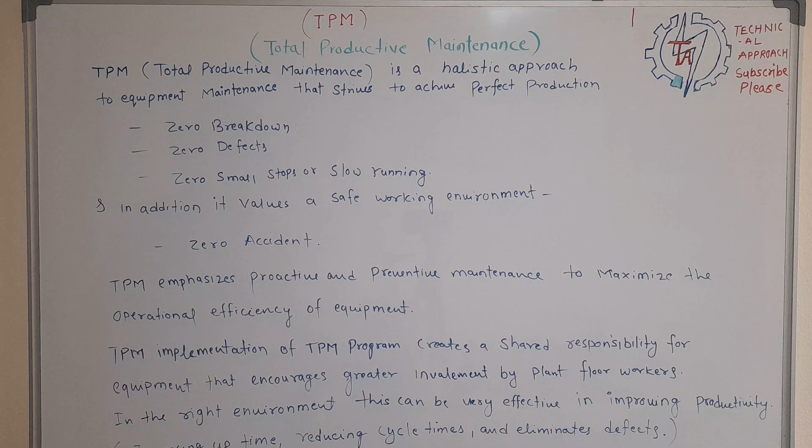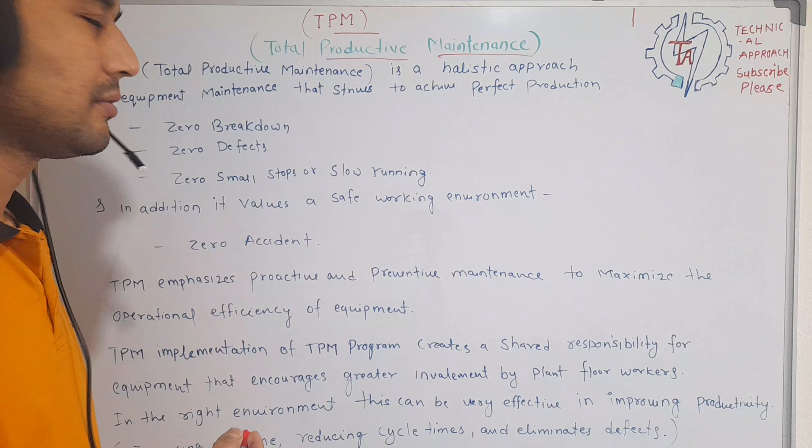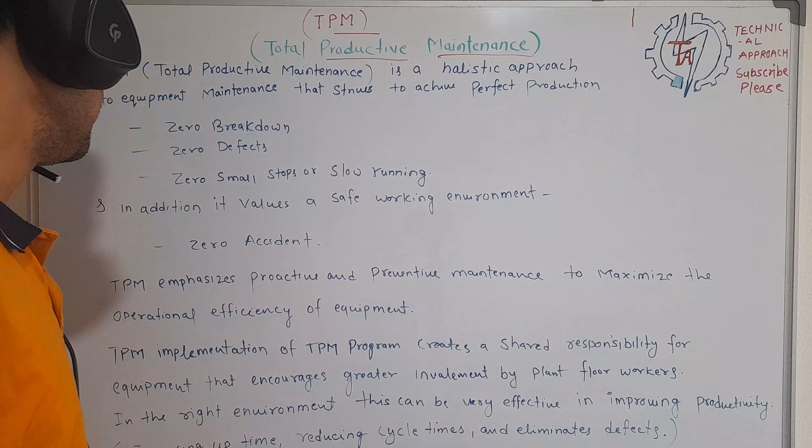Today my topic is TPM. The full form of TPM is total productive maintenance. Most people want to know what is TPM. So TPM, total productive maintenance, is a holistic approach to equipment maintenance that strives to achieve perfect production.

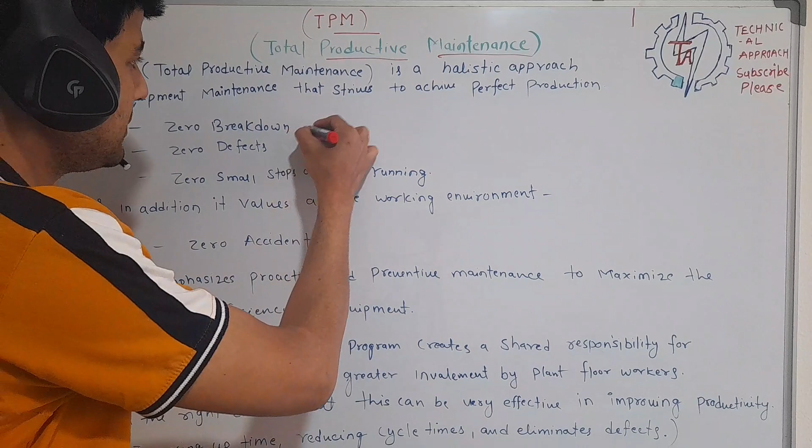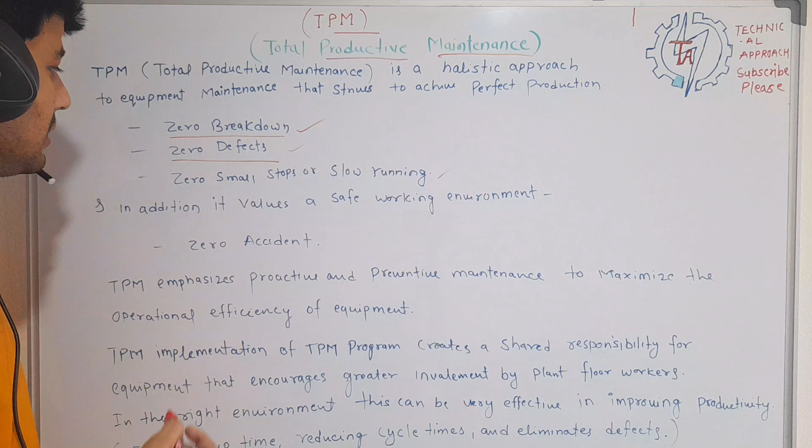TPM follows these points: zero breakdown, zero defect, zero small stops or slow running. In addition, it values a safe working environment or culture, so the fourth is zero accident.

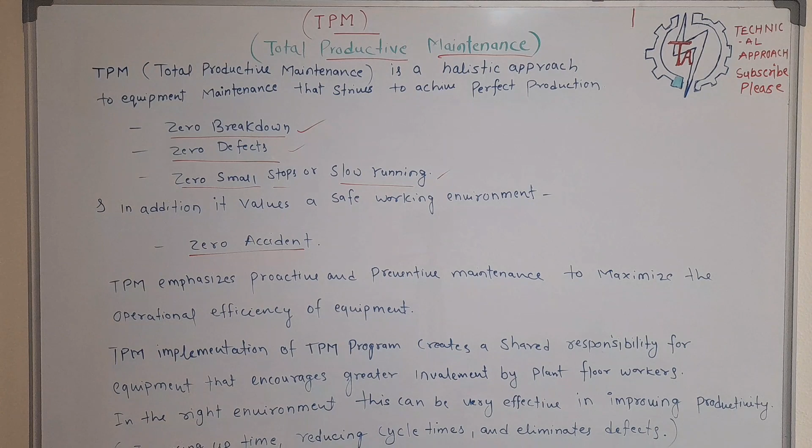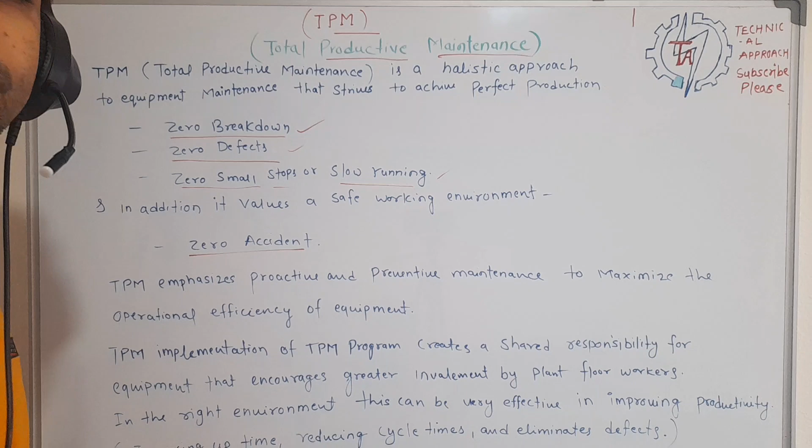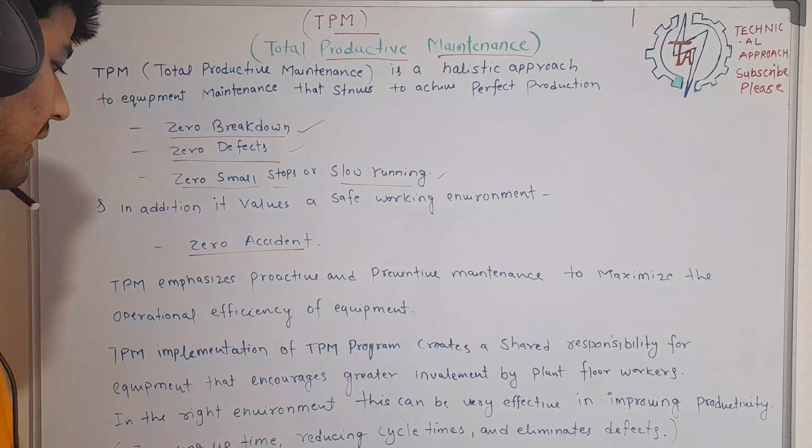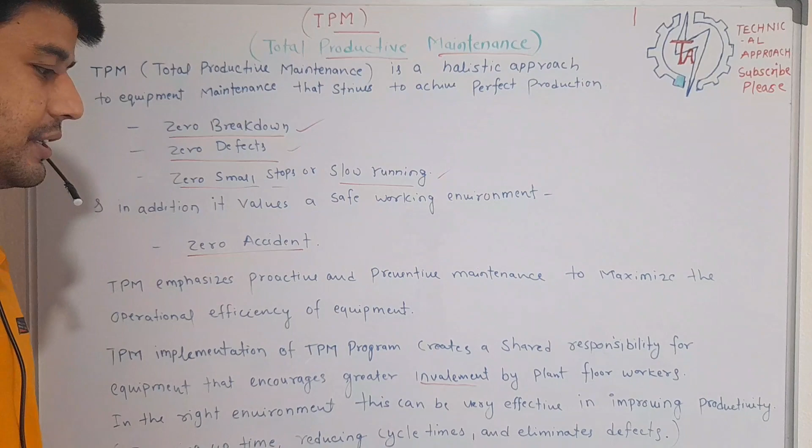TPM emphasizes proactive and preventive maintenance to maximize the operational efficiency of equipment. Implementation of a TPM program creates shared responsibility for equipment that encourages greater involvement by plant floor workers. In the right environment, this can be very effective in improving productivity, increasing uptime, reducing cycle time, and eliminating defects.

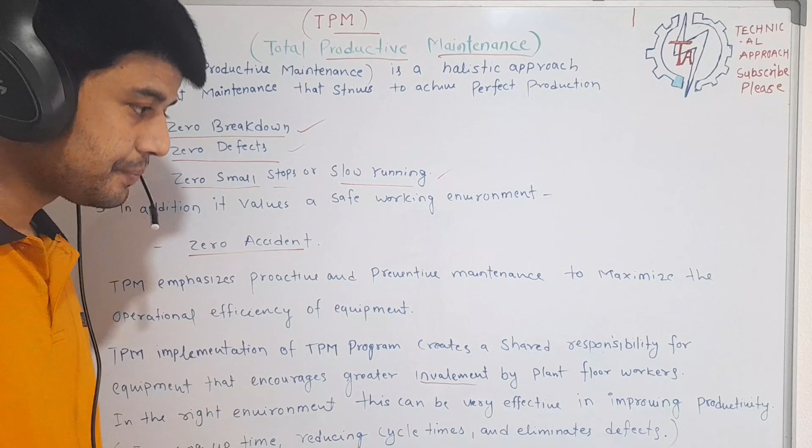Let us discuss total productive maintenance traditional TPM pillars. The traditional approach to TPM was developed in the 1960s and consists of 5 S as a foundation and 8 supporting activities. The 5 S I will define in my next video. Let us discuss here the 8 supporting activities, the pillars.

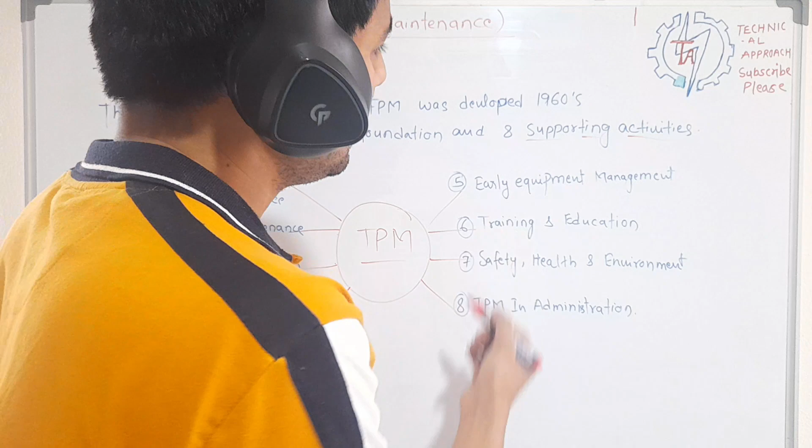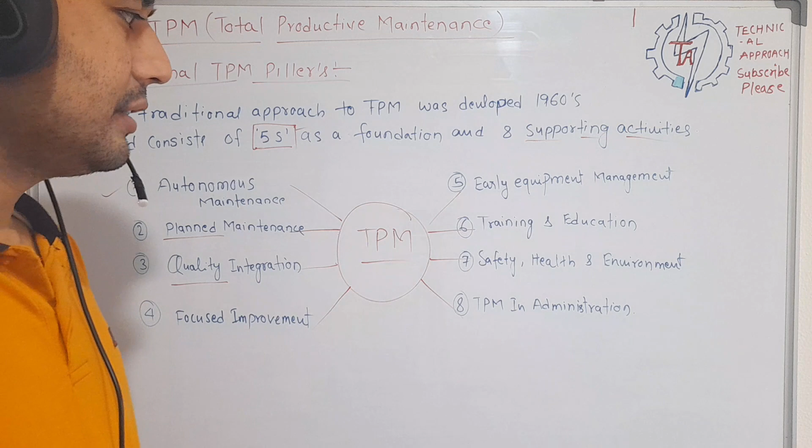The TPM 8 pillars are: first, autonomous maintenance; second, planned maintenance; third, quality integration; fourth, focused improvement; fifth, early equipment management; sixth, training and education; seventh, safety, health and environment; eighth, TPM in administration. Let's discuss all 8 pillars one by one.

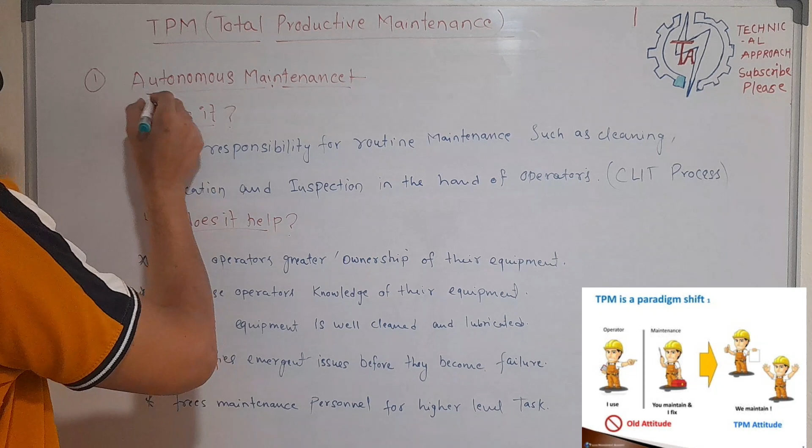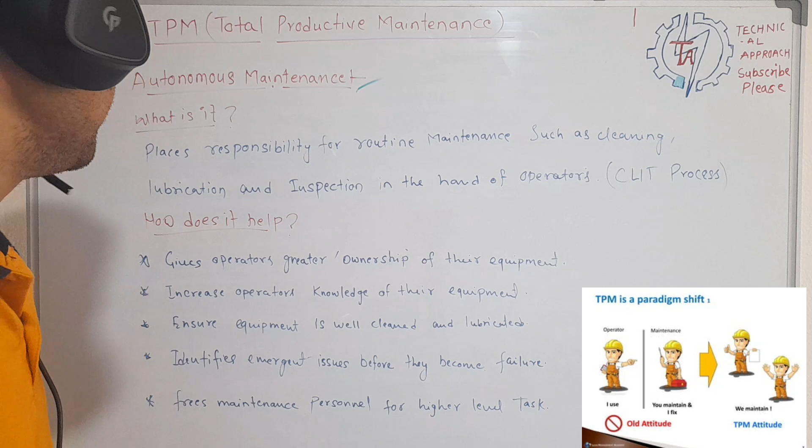The first one is autonomous maintenance. What is it and how does it help in TPM? It places responsibility for routine maintenance such as cleaning, lubrication and inspection in the hands of operators. Here we follow the CLIT process.

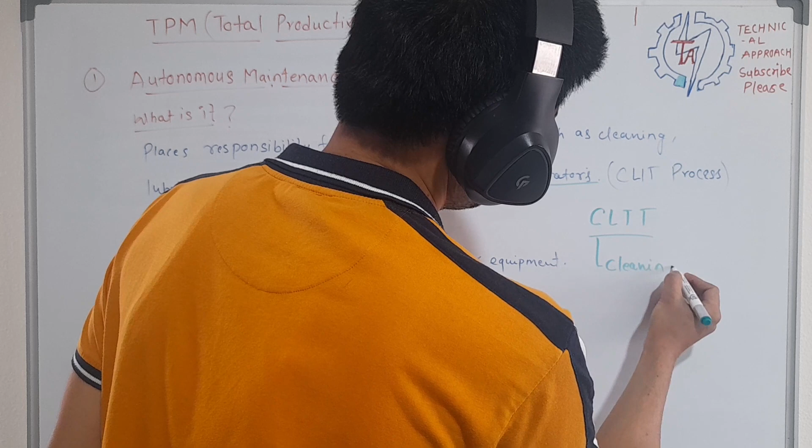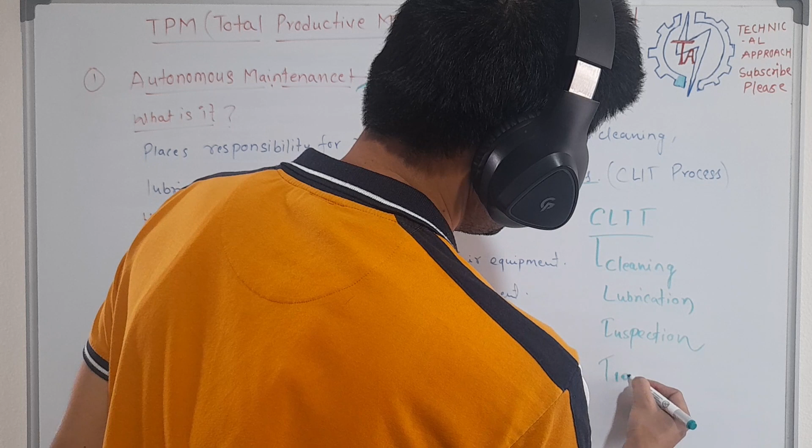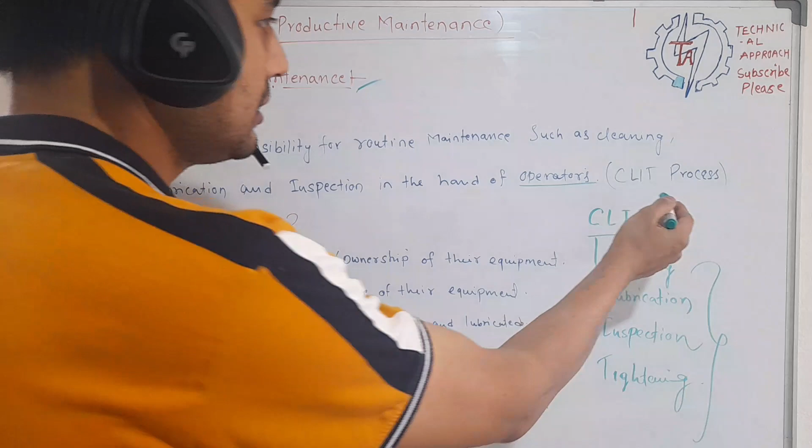Cleaning, lubrication, inspection, and the last one is tightening. If any operator is there, it should be the responsibility of operators for daily routine checkup of the equipment. So how does it help?

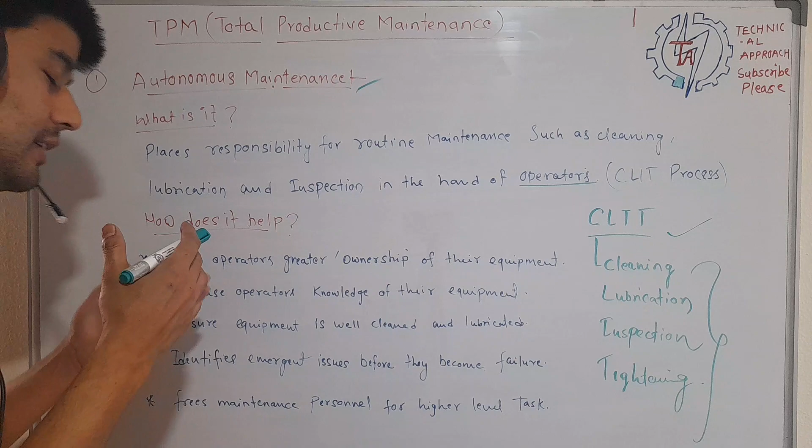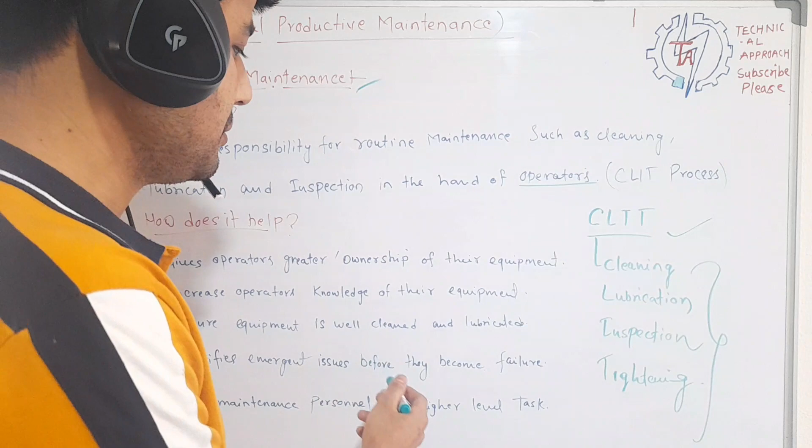It gives the operator greater ownership of their equipment, increases operator knowledge of their equipment, ensures equipment is well cleaned and lubricated, identifies emergent issues before they become failures, and frees maintenance personnel for higher level tasks.

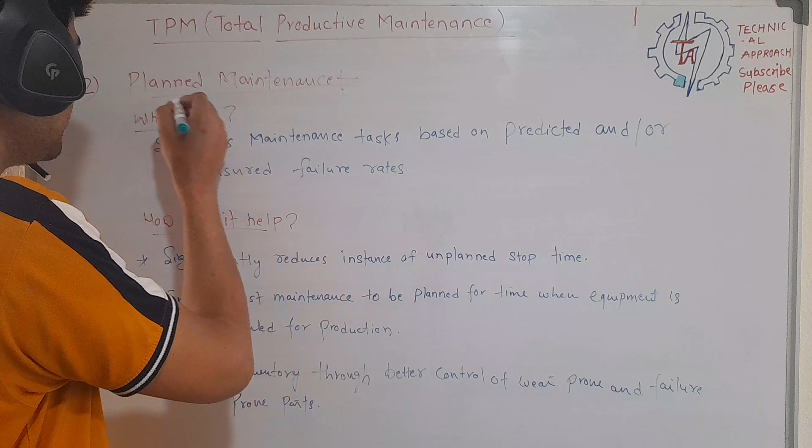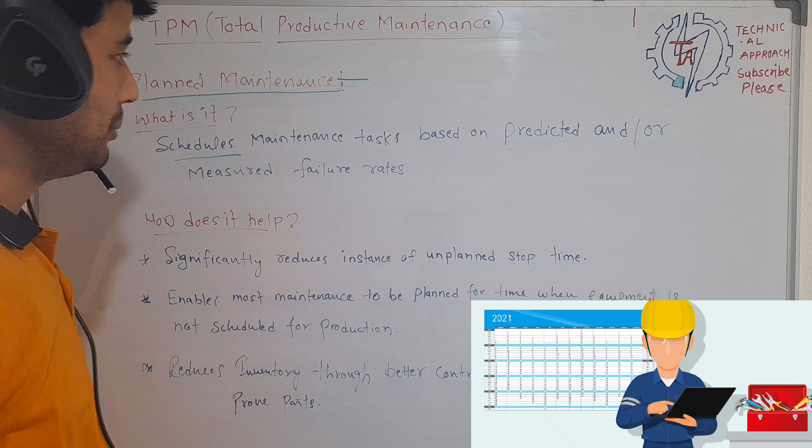The second one is planned maintenance. What is it? Scheduled maintenance tasks based on predicted and/or measured failure rate.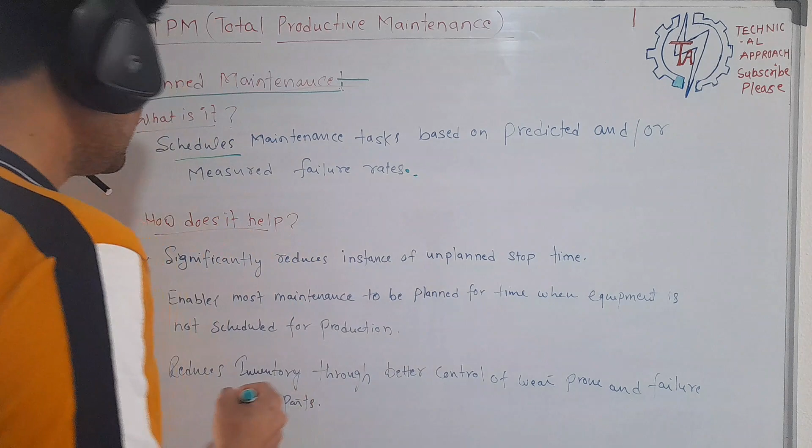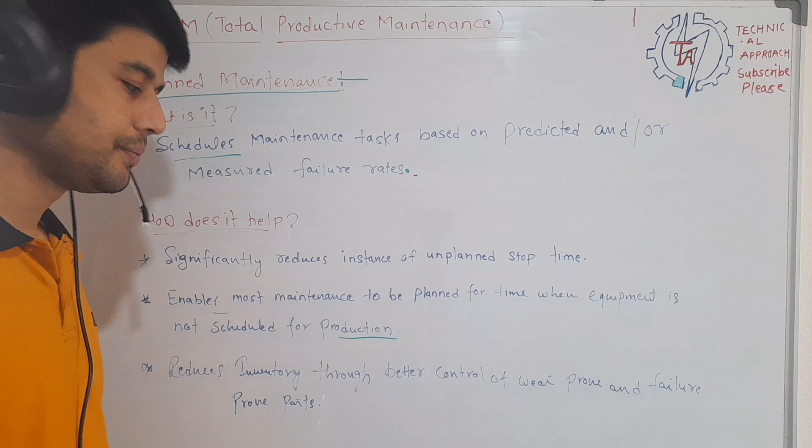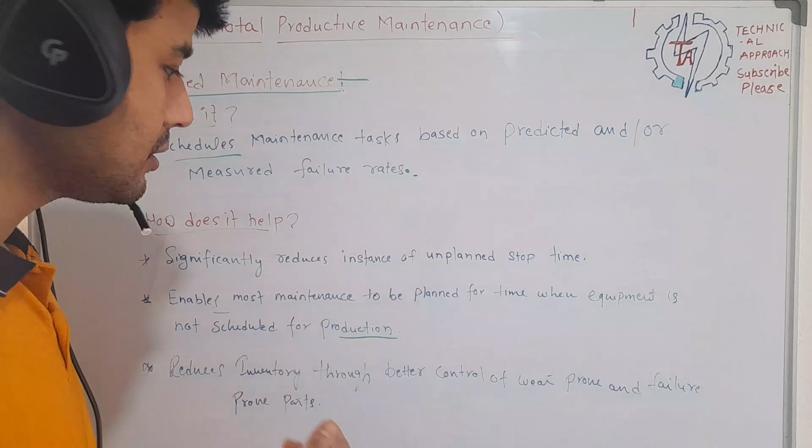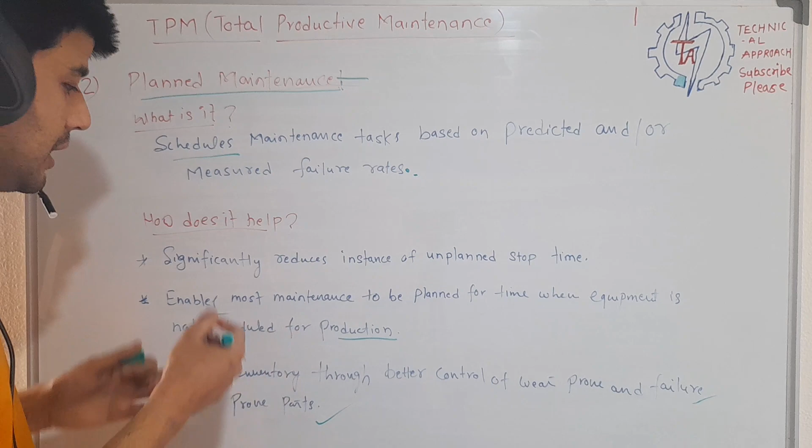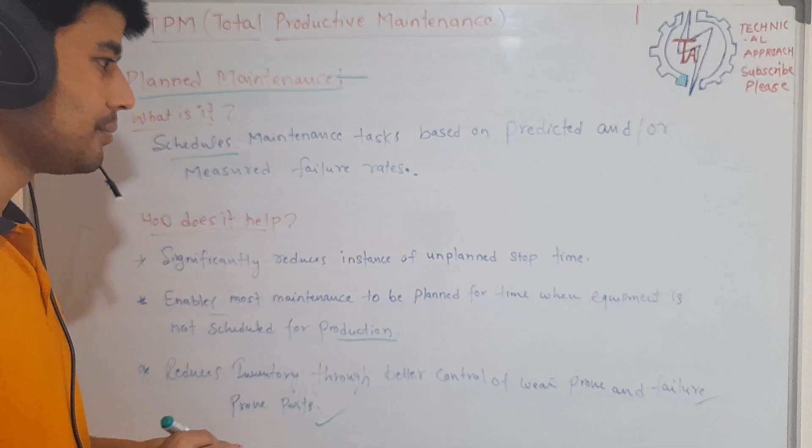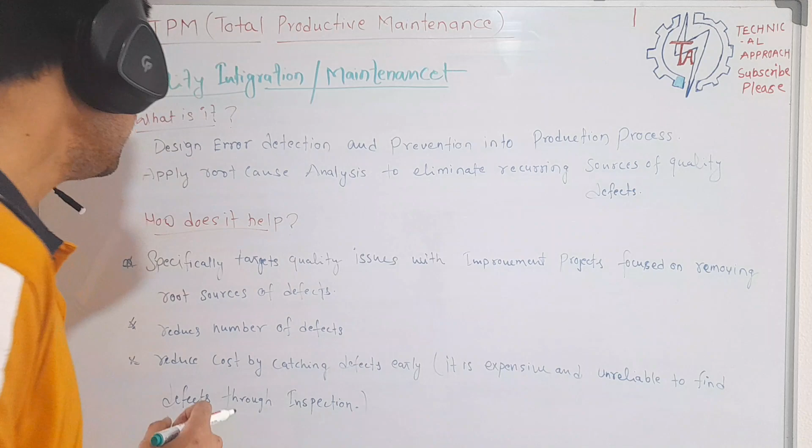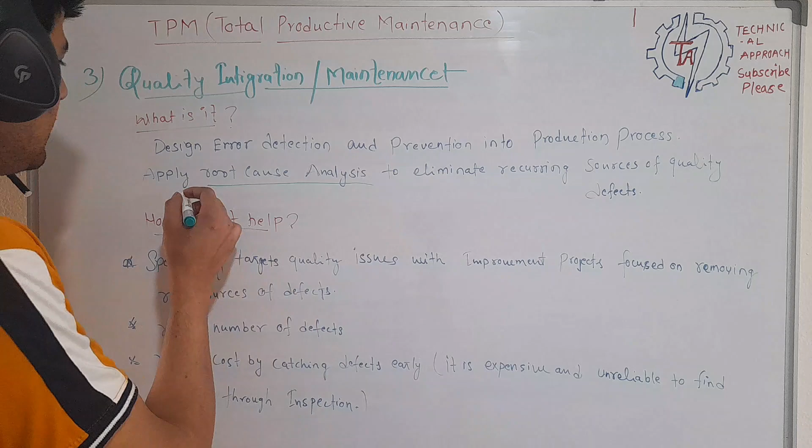Quality plays an important role in TPM, so the third pillar is quality integration or maintenance. What is it? Design error detection and prevention into the production process. Apply root cause analysis to eliminate recurring sources of quality defects. I will define root cause analysis in a separate video.

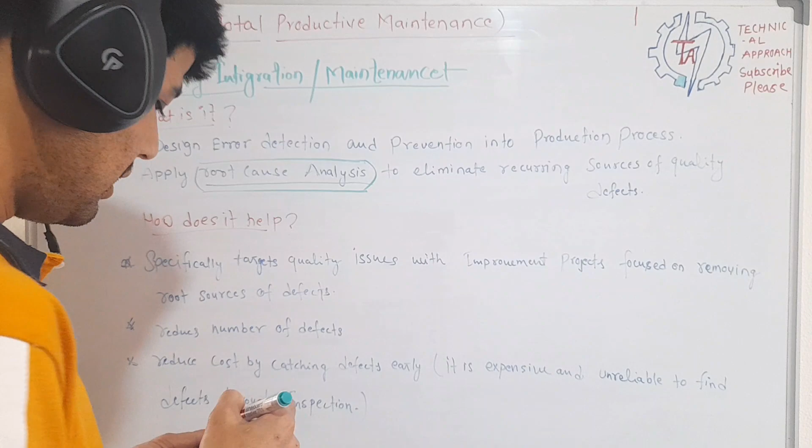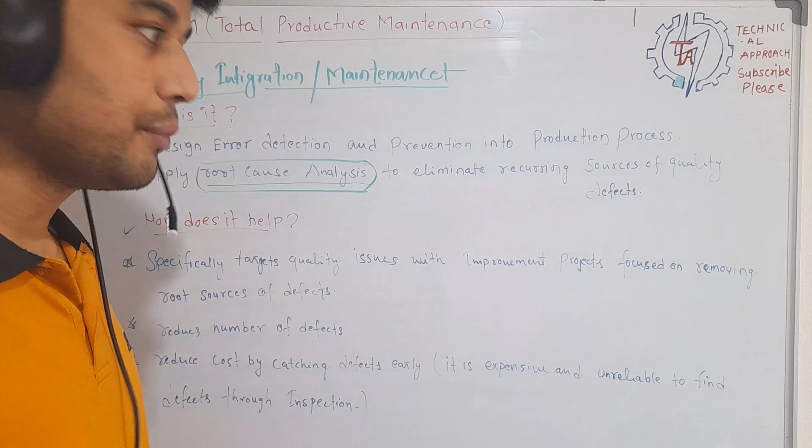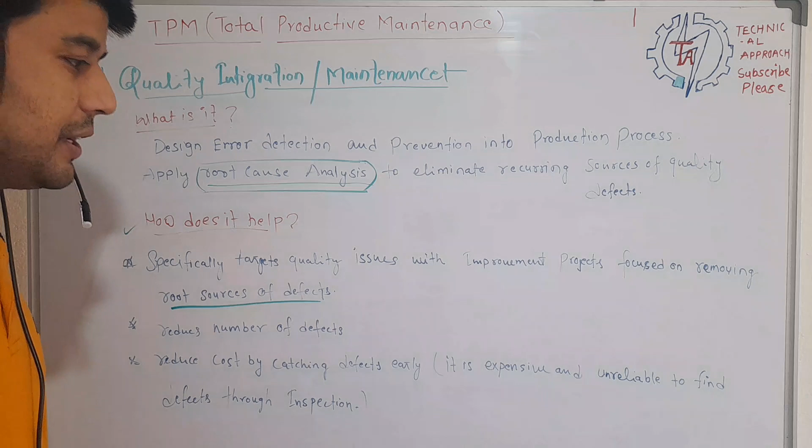How does it help? It specifically targets quality issues with improvement projects focused on removing root sources of defects, reduces the number of defects, and reduces cost by catching defects early. It is expensive and unreliable to find defects through inspection.

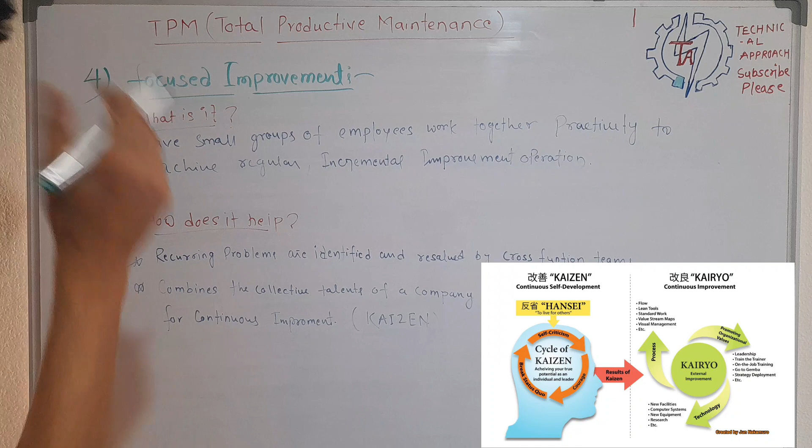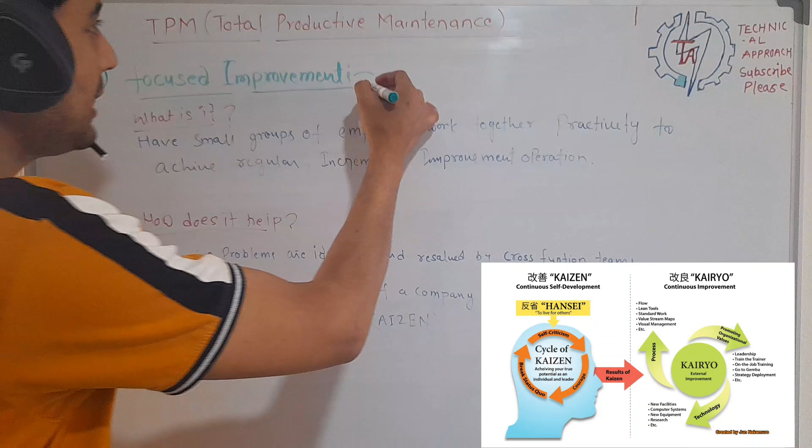The fourth pillar of TPM is focused improvement. Without improvement, we can't change the productivity, so improvement is a necessary part of our productivity. What is it? Have a small group of employees work together proactively to achieve regular incremental improvement in operations.

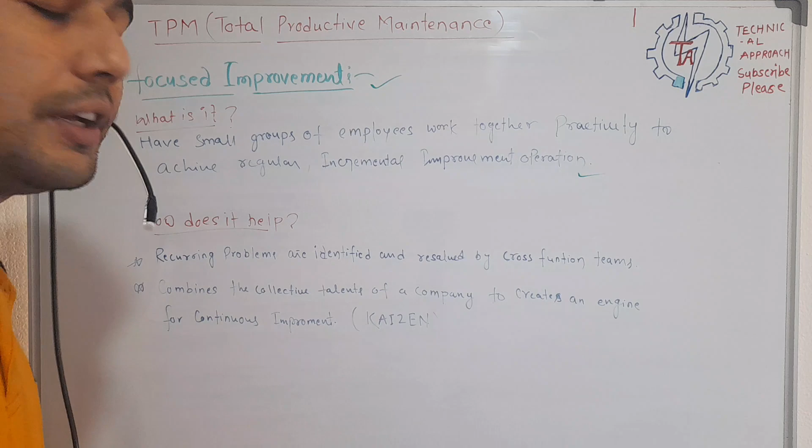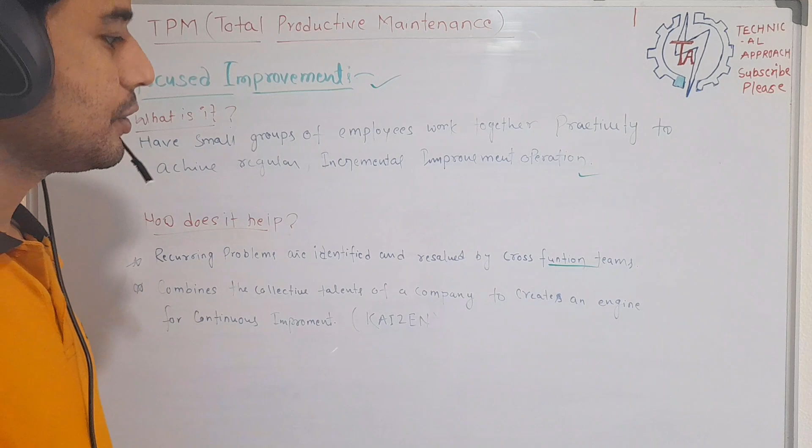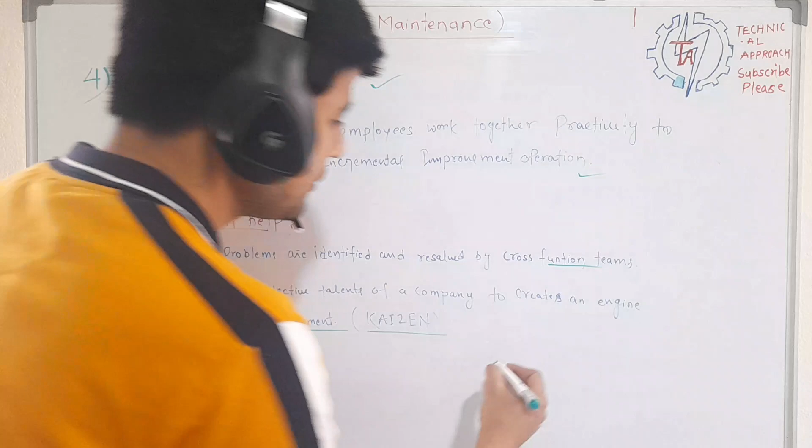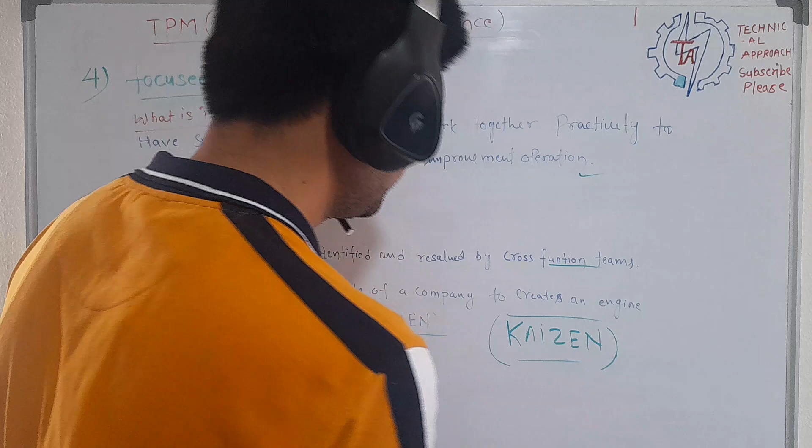How does it help? Recurring problems are identified and resolved by the cross-functional team, combining the collective talents of a company to create an engine for continuous improvement, also called Kaizen. I'll define Kaizen in the next video - it is called continuous improvement.

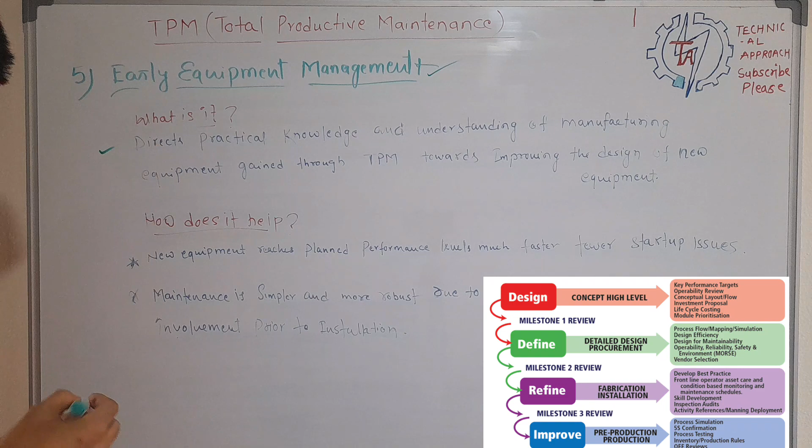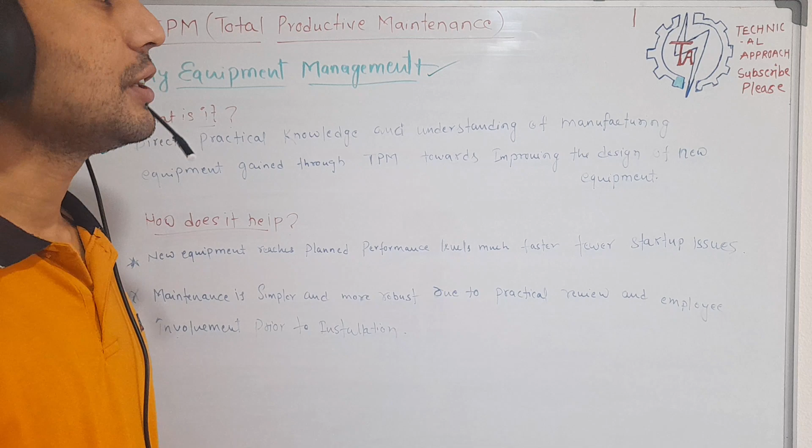The fifth one, early equipment management. What is it? It is direct practical knowledge and understanding of manufacturing equipment, gained through TPM, towards improving the design of new equipment.

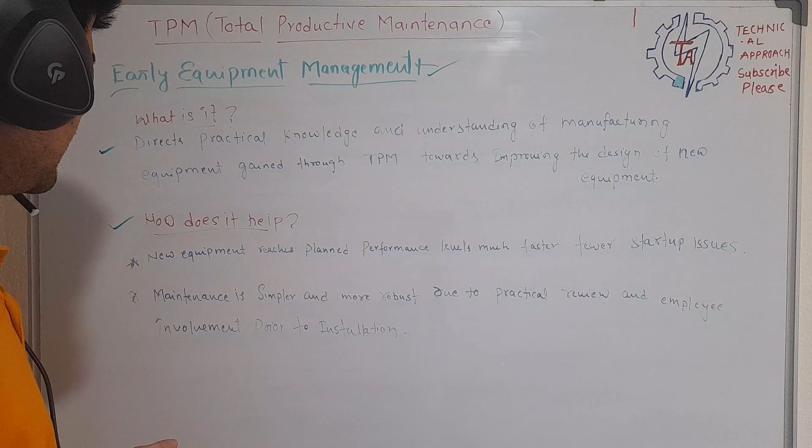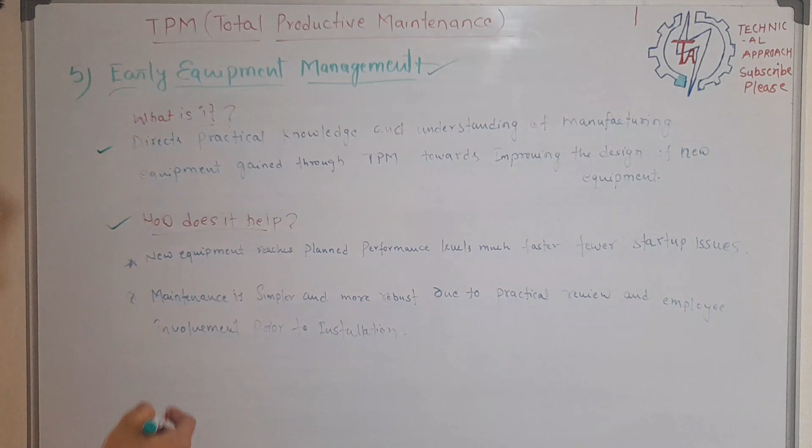How does it help? New equipment reaches planned performance level much faster, with fewer startup issues. Maintenance is simpler and more robust due to practical review and employee involvement prior to installation.

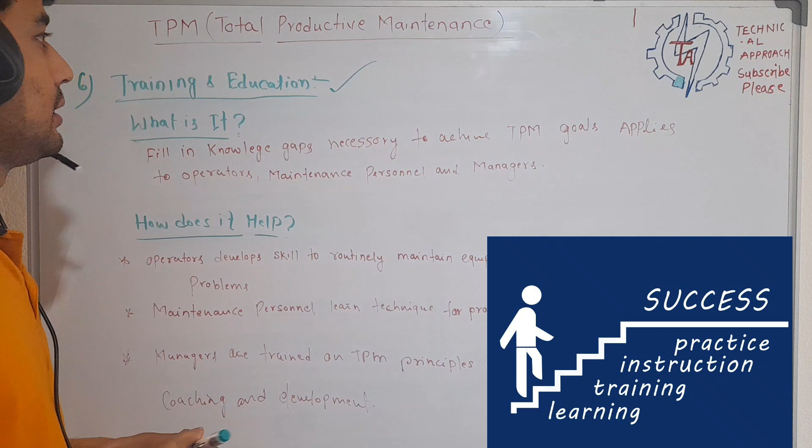The sixth pillar of TPM is training and education. What is it? Fill in knowledge gaps necessary to achieve TPM goals. Applies to operators, maintenance personnel, and managers.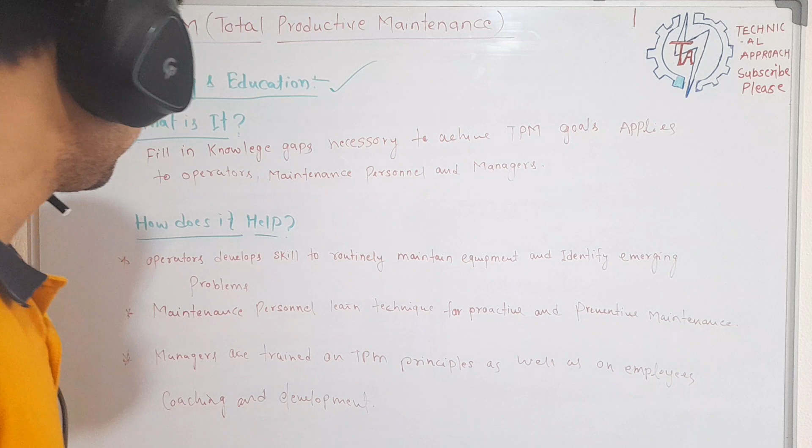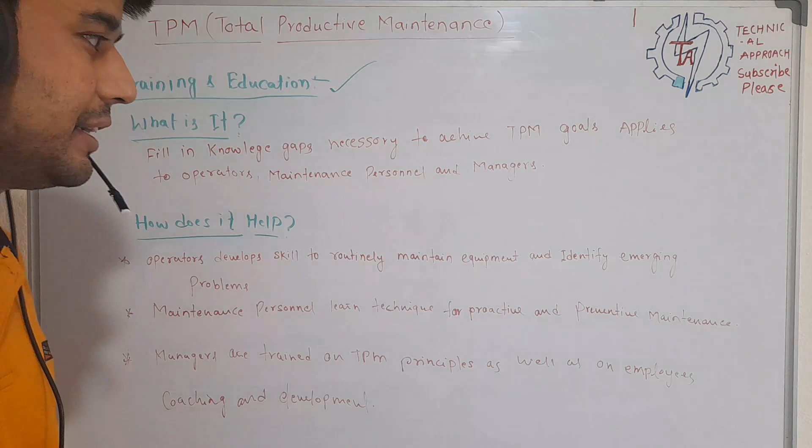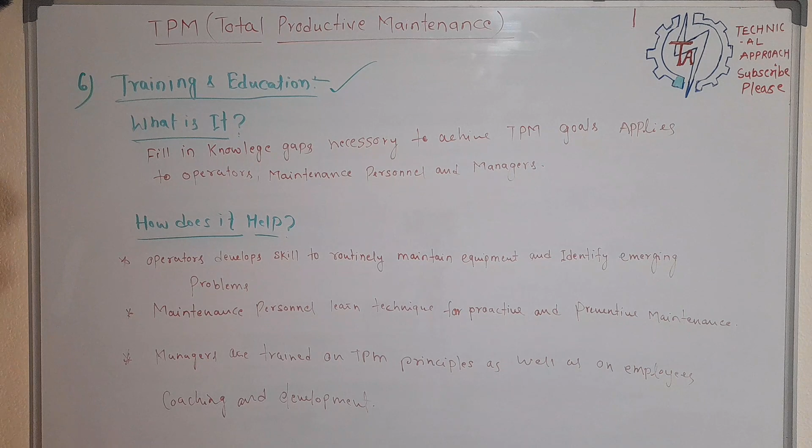How does it help? Operators develop skills to routinely maintain equipment and identify emerging problems. Maintenance personnel learn techniques for proactive and preventive maintenance. Managers are trained on TPM principles as well as employee coaching and development. It is totally based on education and training.

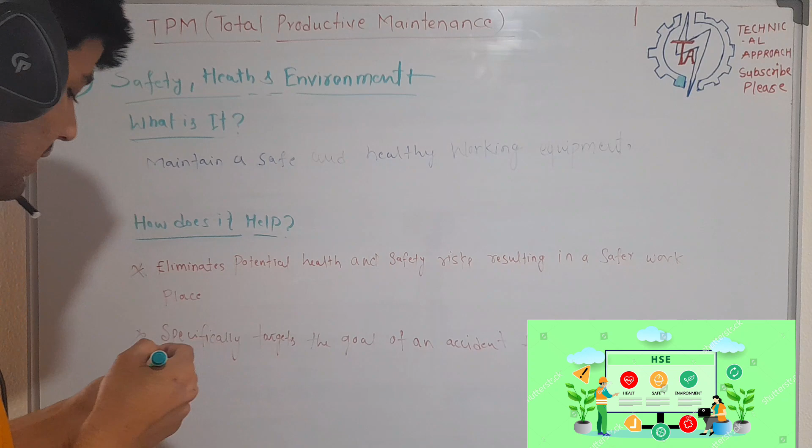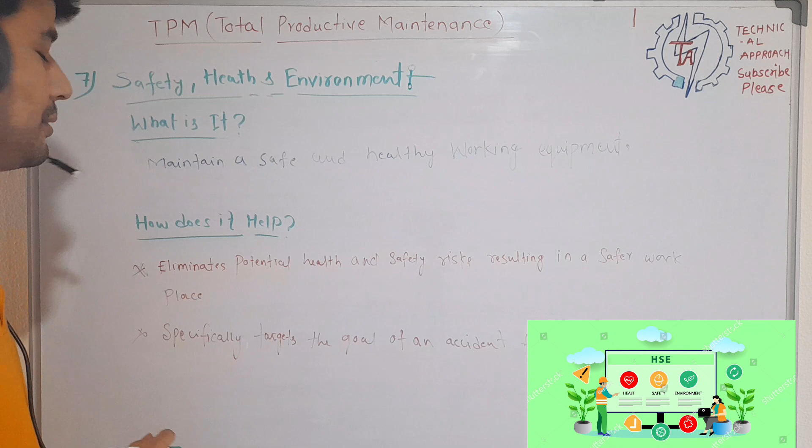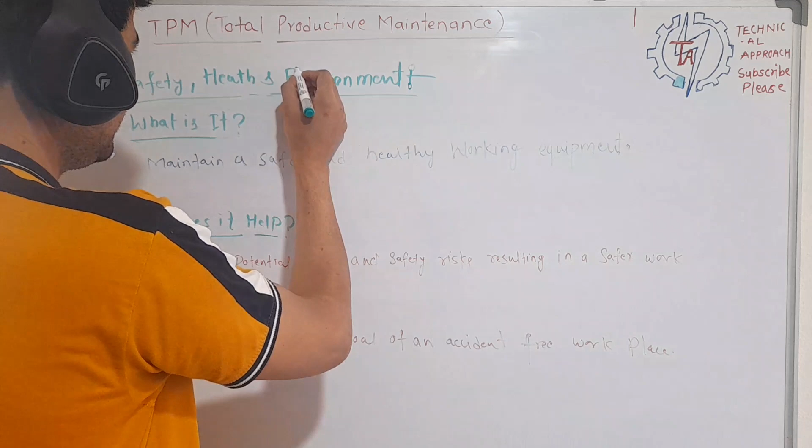The seventh TPM pillar is safety, health and environment. Suppose you are unsafe, so you can't give 100% productivity, and if you're not fit or healthy, that also affects your productivity, and your environment also affects your productivity. So overall, this seventh pillar is safety, health and environment related.

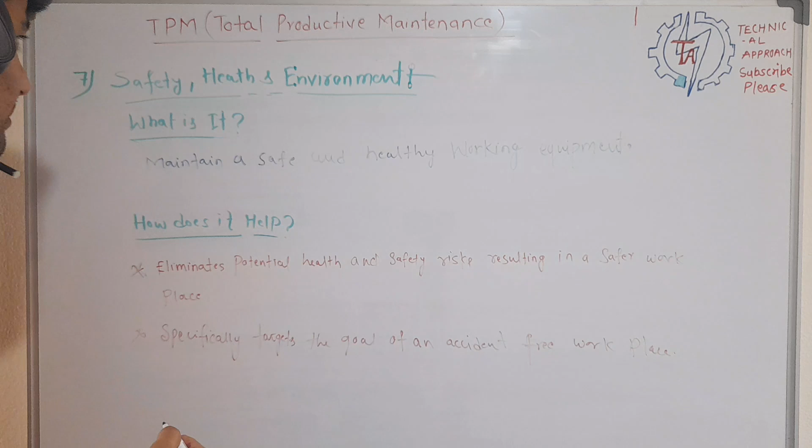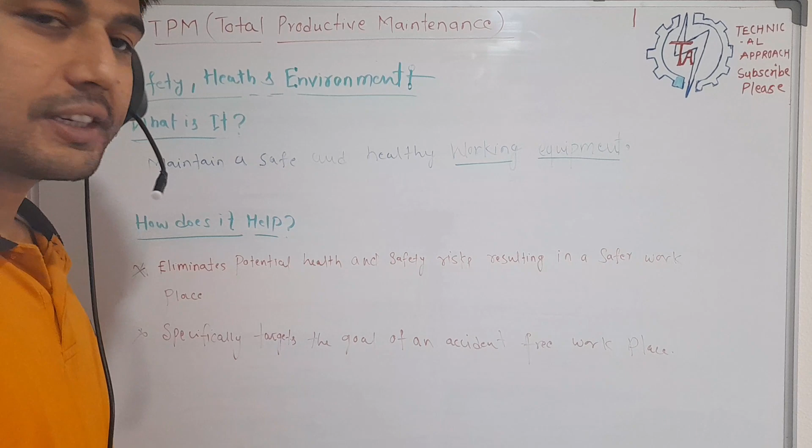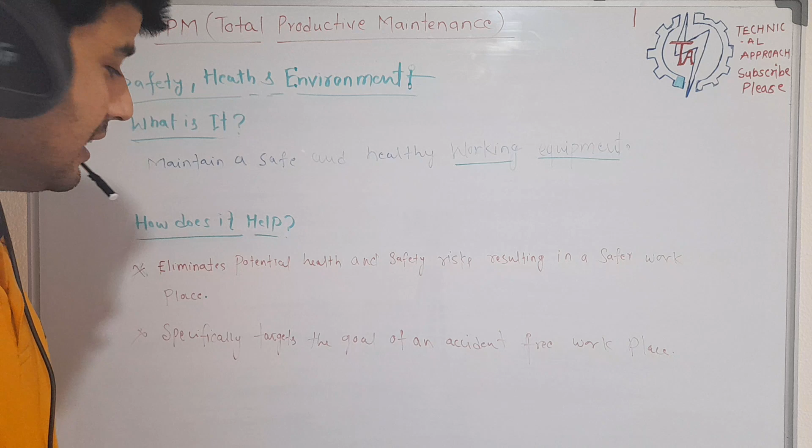What is it? Maintain a safe and healthy working equipment, environment or culture. How does it help? It eliminates potential health and safety risks, resulting in a safer workplace, and specifically targets the goal of an accident-free workplace.

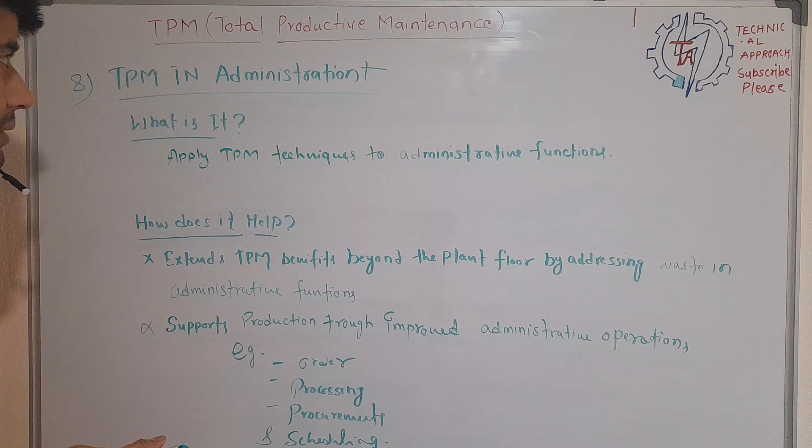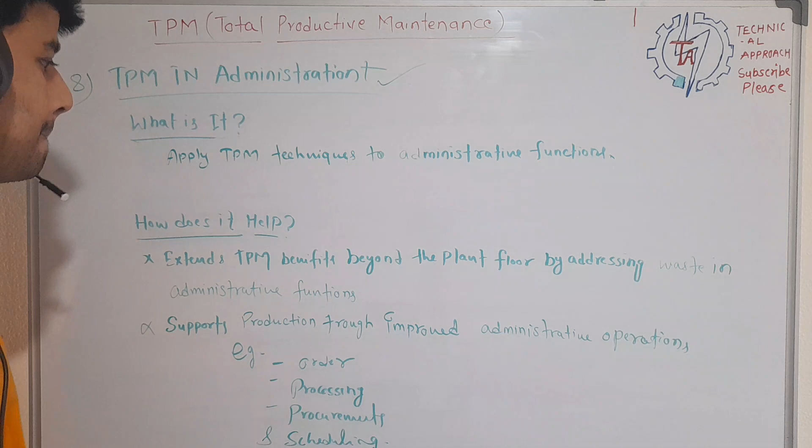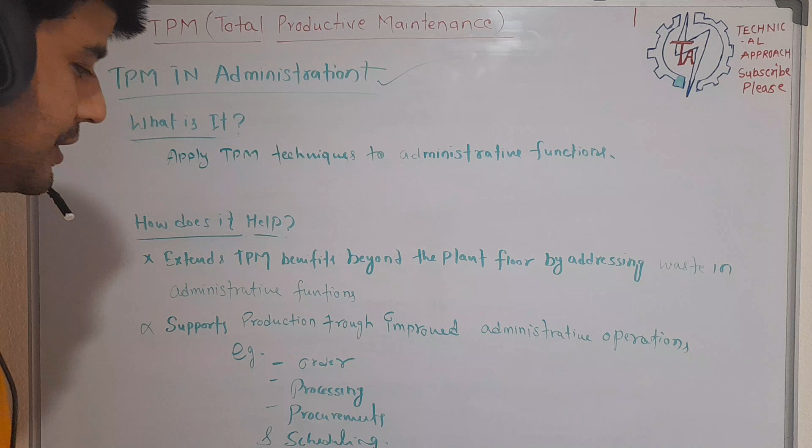Now the last is TPM in administration. What is it? Apply TPM techniques to administrative functions. How does it help? Extend TPM benefits beyond the plant floor by addressing waste in administrative functions, supporting production through improved administrative operations, for example order processing, procurement, and scheduling.

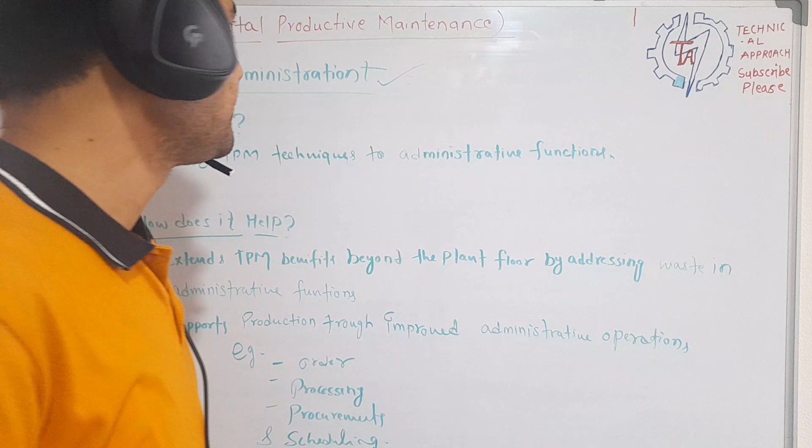So I have defined here what is TPM, total productive maintenance, and the 8 pillars of TPM. So that's the end of the video.